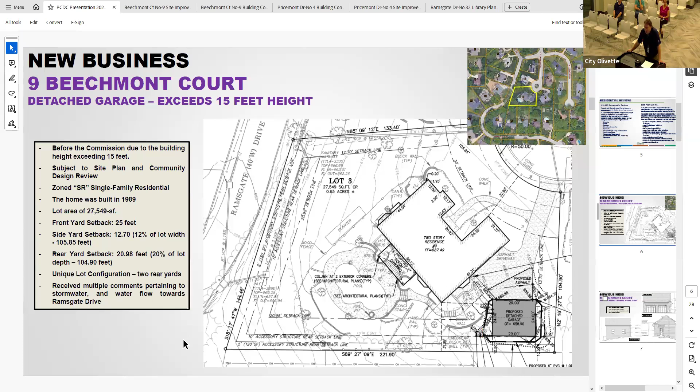We have also received multiple comments pertaining to stormwater and water flow towards the Ramsgate Drive area. So you will hear from multiple people tonight about that, as well as we have some more information later on in the presentation.

Also before you, within the attachments, you have your staff report, the petition application, the site plan, the building construction plans, as well as one email that we received from one of the neighbors.

So in front of you right now are the elevations for 9 Beechmont, which is the detached garage. You can see that the height exceeds that 15 feet, and it is about 21.4 feet on the front elevation, measured from the front side, the face closest to the street.

This can no longer be approved administratively through us, so that's why it's before the commission. It's subject to that site plan and community design review.

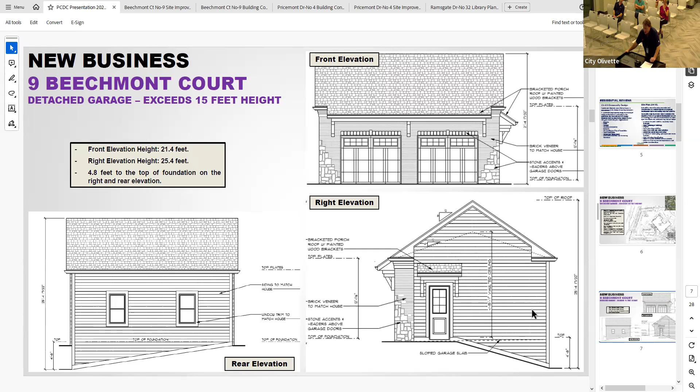They also sent in BMP information, and they're proposing to implement an NDS Flo-Well, which is kind of hard to see, but you might be able to see it better on the dais. It's located directly to the left of that garage. The graphic there depicts the garage, which is going to be a 696 square foot garage.

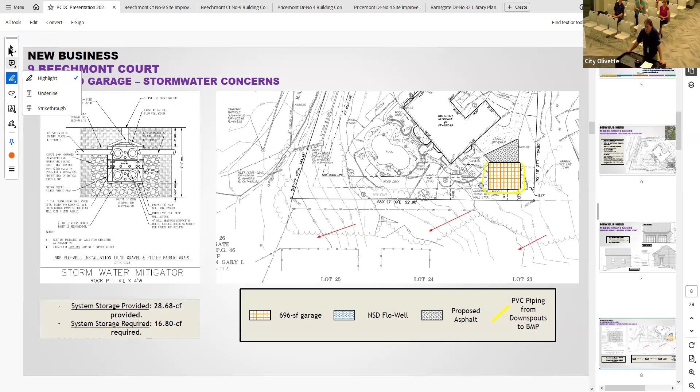This detached garage is due to the size of the lot. They're actually allowed up to 700 square feet for the accessory structure, so they're just a little, 4 square feet below would be too much.

They're also proposing adding some more asphalt to connect the driveway to the garage, and everything in yellow are the locations of the PVC piping that connect from the downspouts into that Flo-Well. Those red arrows depict the grade, how it will slope more east to west where the water is flowing.

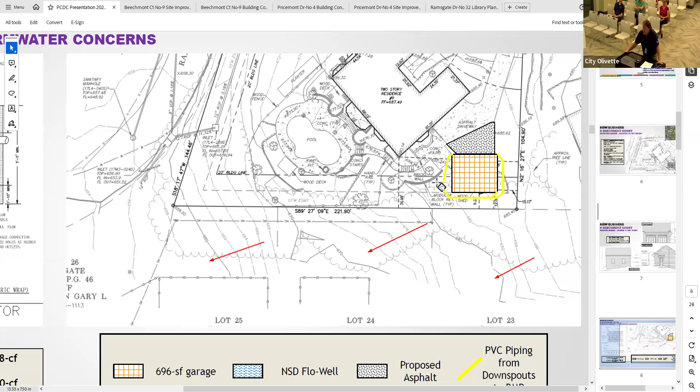Also, the storage system that was provided holds about 28.68 cubic feet, and through the calculations that we received, it stated that they were only required 16.8 cubic feet. So they have some more room for additional stormwater.

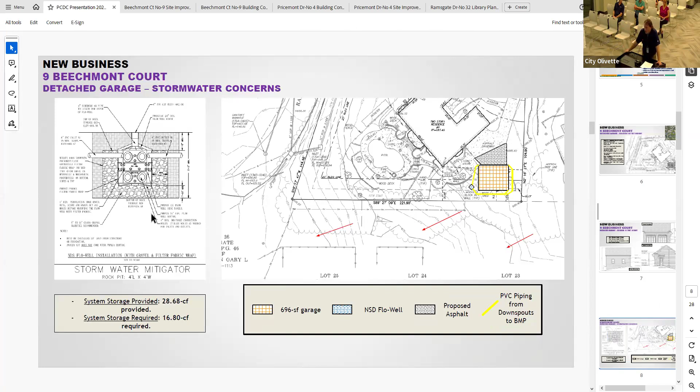In front of you is also something pertaining to the driveway and stormwater concerns. You can see that everything in gray is what was actually existing for the existing driveway. The portion in red is the part of the existing driveway that will be removed due to the garage. The portion in blue is the proposed 43 square foot driveway addition, so they're only adding 43 square feet from what was existing to the proposed driveway.

And then you can see that there was an existing shed in the location of where that garage is, and with the proposed garage, that shed will no longer be there. Just going to check through here real quick. I think we did receive those stormwater comments.

We received comments pertaining to different properties located south of the lot, downhill from 9 Beechmont. Of course, with it being subject to site plan review, everyone was notified with mailings within a 300-foot radius of the property, as well as we met with neighbors yesterday to discuss the stormwater concerns, and they are present here tonight to address those public comments as well.

How'd that meeting go? I think it went well. We addressed the questions, and then they're here before, going to step before the commission to state their comments and concerns pertaining to the petition.

So I saw the emails and they question a lot about the previous engineering study, things like that. So what was the conclusions? I had not been in contact with the person who sent this email. From what I understand, the petitioner is here tonight, as well as a representative for the engineering portion of the stormwater as well.

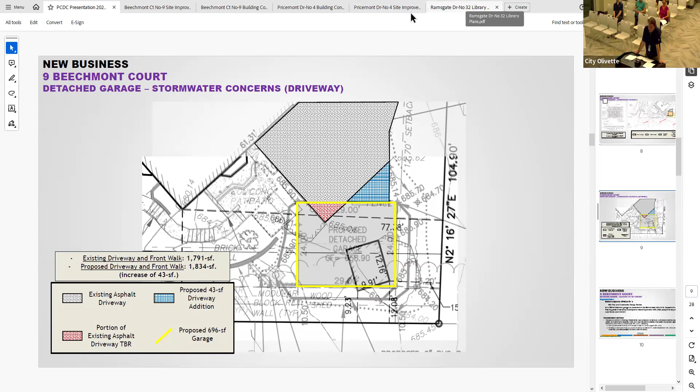Carlos, can you pull up a street view? Bear with me one second because I need to change the screen views.

And I would ask one of the petitioner representatives if this is the correct house. I believe it is, yes. And unfortunately, Ms. Powell, this is the next view on the streetscape, and then it gets cluttered, so that's as close as we get to that house. So I think going forward, you're going to hear me probably asking for an actual photograph rather than just street view, so that we can actually see what's going on in this circumstance.

So it looks like there is an existing garage on the left side of the structure, and I'm just curious as to what's happening with those doors, if anything. Are we going to a 4-car garage, equivalent of a 4-car garage? I think that's probably best answered by the petitioner. And what we could do is, if we don't have any more questions for Jack or Carlos, we could go ahead and bring the petitioner up.

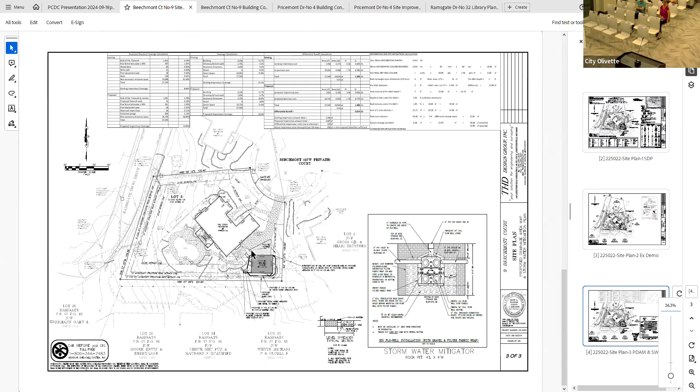Let's see if we could bring up page 3 of 3, please. Great, here we are. So if we could look and zoom in at these calculations up here, starting with the ones on the upper left.

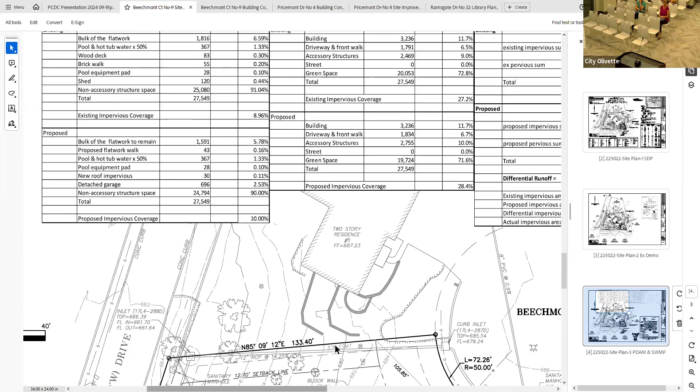These are required calculations for any plan that goes before Olivette. Olivette has an accessory structure coverage calculation maximum requirement of 10% of the lot area. The existing calculation of the accessory structure coverage percentage is 8.96%, and in the proposed, it's 10%. So there wasn't much room to increase that to begin with.

And then here are the coverage calculations. The existing imperviousness of the lot is 27.2%. We're proposing to take it to 28.4%.

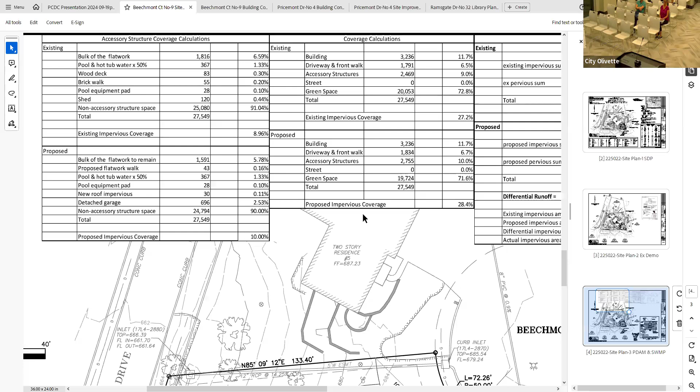If we could just pan on over here, we're done with those two sets of calculations. We've got two more to look at. If we could get this brought to about the edge of the screen, a little bit more.

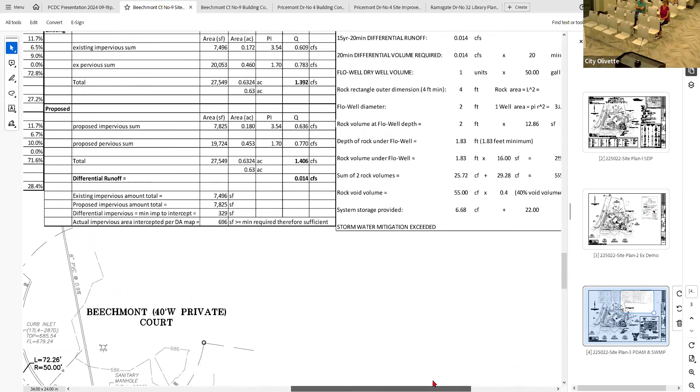Okay, that's great. So the third set of calculations is differential runoff. That shows that with the existing impervious area, times the MSD PI runoff factor, we get the individual CFS portions for the impervious part and pervious part of the lot. Those are added together, so in the existing conditions, we have 1.392 CFS calculated.

For the proposed condition, it sums up to 1.406 CFS. That's a differential of only 0.014 CFS. Just to put that in perspective, the typical MSD detention rule is they don't require detention until that differential reaches 2.0 CFS. So we're less than 1% of that amount.

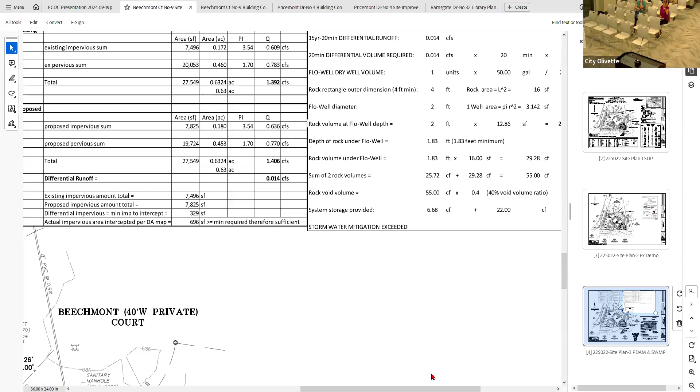This is really almost nothing, but it's not like we're not doing anything about it, because we are mitigating in the Flo-Well system. So we've got our differential runoff, 0.014 CFS, times the MSD 20-minute storm - 20 minutes times 60 seconds - gets 16.8 cubic feet. That's what's required. We're providing almost twice that much.

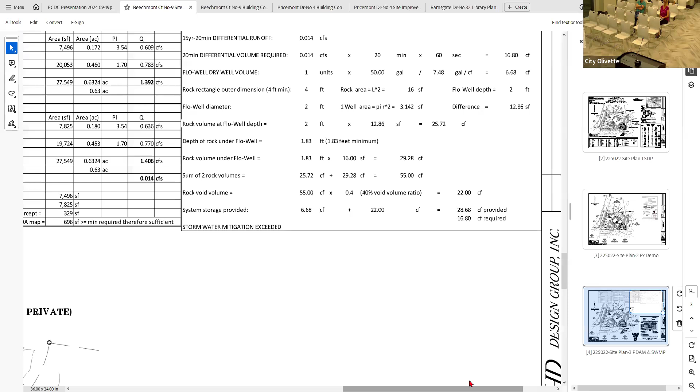If we could, I think on this sheet, maybe on the left side, there's a diagram - right here it is, I'm sorry. This is our stormwater mitigator.

In this, the flow is going to get captured from the roof drains on the proposed detached garage. It's going to get routed from all four corners, brought in on two sides, just like the picture shows. So water's going to go there. Here's the dimensions of it.

It's just from the surface of the ground, a little under 5.5 feet deep. Water's going to come in here, be dropped into this plastic chamber, this Flo-Well chamber, and water will be able to come out and sit here in the rocks. It will get a chance to percolate into the ground over time.

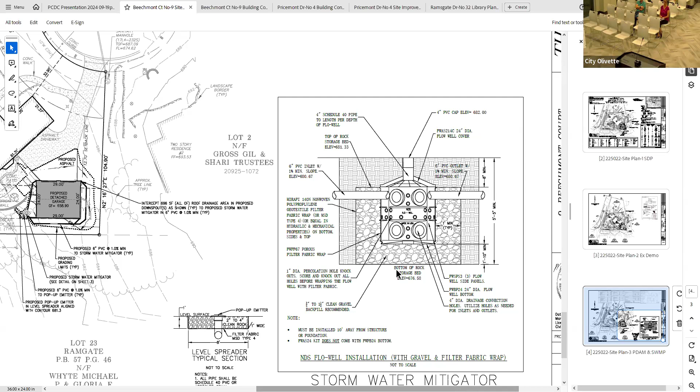If by chance during very intense storms this would all fill up and the infiltration ability of the ground would be exceeded, the stormwater would slowly rise up to here. Then, with this as an intake pipe and this as an outlet pipe at the same elevation, it would discharge right here in this very short pipe to this level spreader, which there's a diagram of right here.

It's 8 feet wide, and it comes up in this pop-up emitter, and then from the pop-up emitter, it will run into the gravel, which is 1 foot deep, 8 feet wide, 1 foot in depth also. That allows water to have a secondary chance to percolate into the ground. And then as that would fill up and start to leave, it would be in a similar or better condition than the existing.

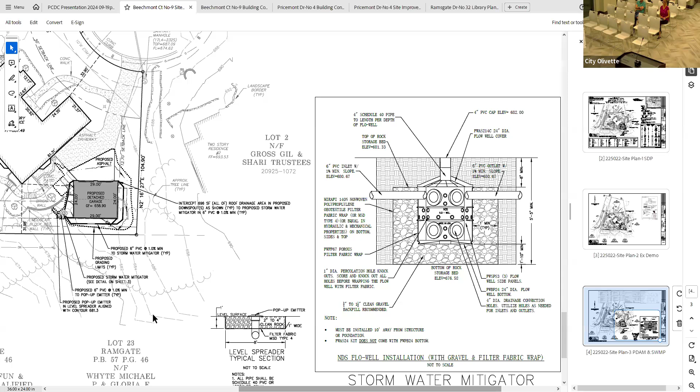These stormwater mitigation systems have been in existence for about 10 years. Almost all the municipalities have adopted them as a way to allow reasonable, small additions to a house, such as in this case, where the owner wants to add a detached garage.

I appreciate it, good job going through that. The question I had was about the slope of the driveway — is there any way to get the discharge to follow the driveway to the street? I was looking at the contours and honestly couldn't tell. Carlos, could you pull up the street view?

I think that's probably not going to tell us much, but we can look. I can see a contour right here at 686, and a break right at the setback line. It looks to me like this water is going this way. I don't know if any of it's getting to the street — I'd doubt it. I'd say it's probably just running over here.

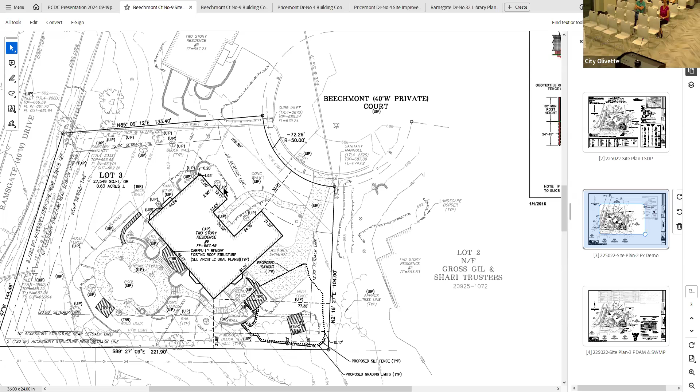It's very informative. Does anybody on the commission have any questions for the engineer or the petitioner? If not, is there anybody in the audience with a public comment? Go ahead sir, remember to state your name and address for the record.

I'm Michael Whyte, I live at 23 Ramsgate Drive. That's my wife Gloria, and our neighbor at 24 Ramsgate Drive, Dr. Shu Chuck. Thank you for allowing us to meet with you. We had the pleasure of talking to Mr. Trejo yesterday and his associate about the plans, and we looked carefully at what you showed here and wish the project the very best. But we're worried about the water issue.

It was described a few minutes ago as heading southwest. That's probably what would happen with substantial rainfall in the future if that garage is built without adequate drainage. Currently in our backyard at 23 Ramsgate, partly behind number 9 and the other house, there's a slope, but if it rains an inch or two it comes down uniformly and doesn't threaten the house — no problem. But three years ago I went emeritus at Washington University School of Medicine and I remain active doing research. So I spent $120,000 to build a library in my backyard, which will be directly behind that garage. We have pictures of it.

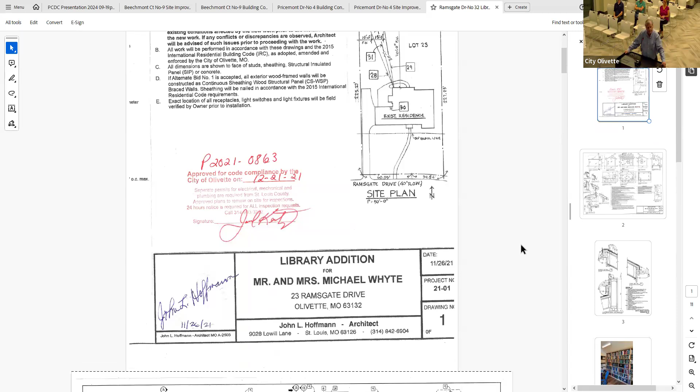It fit on the footprint quite nicely, but it's not a shed for tools. I moved 130 books into the library. You'll see it in a second. There's research journals, and I have my Washington University computer in there, printer, and that's where I write

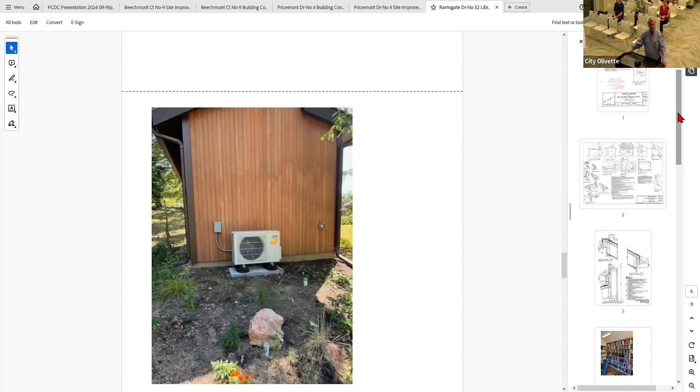research papers, edit books, review submitted papers. This is directly behind the proposed garage, where currently, without the garage there, the drainage is sort of due south. If that's there, it's going to head southwest. And on the west end of this library is that mini split, which is just above the ground, and that's what's cooling and heating and supplying electricity, well, heating and cooling to the library.

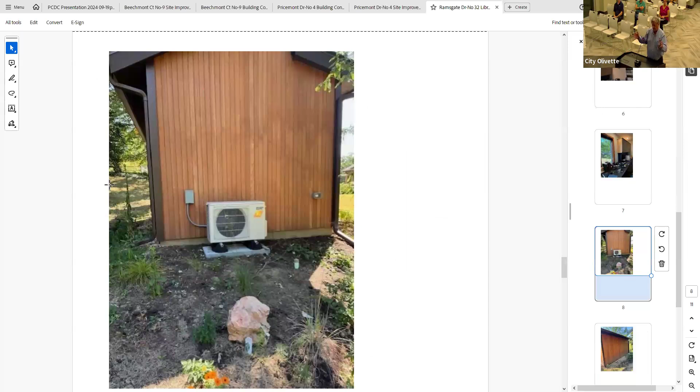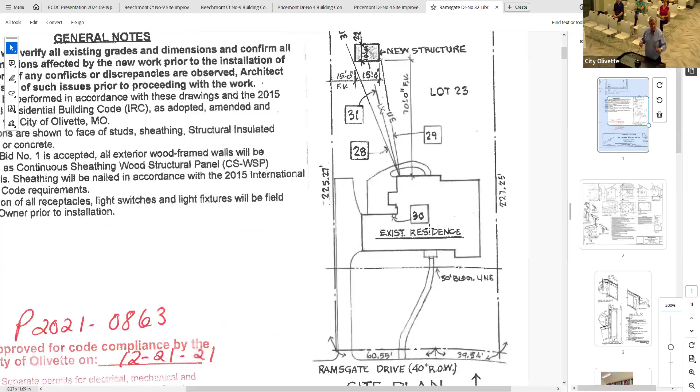And I'm worried that that might be jeopardized if there's a 1 or 2 inch rainfall. We heard about the cisterns that are planned, west side, and maybe the east side of this proposed garage. But we have to understand the capacity, cubic feet. If there's a 1 inch rainfall with that sort of area on top of the garage and it's heading into a cistern on the west and it exceeds it, what happens with that water? Is it going to come into my library? That's the question. That's our worry.

Understood. Do you currently have any issues right now with that house under the existing conditions? Oh, no. In terms of water to our house with the way the house is currently, I don't think so, have we? If we had the 8-inch rain, water.

No, but that's because of gutter clogs around the house. I don't think that slope has ever jeopardized the house, being far away and that sort of area able to accommodate even a substantial rainfall. But this, with it coming into cisterns on the west side, will probably head right back to our library.

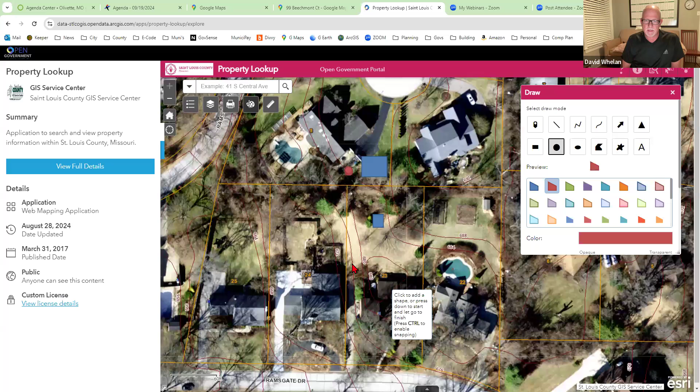Okay, can you hear me? Yes, sir. Thanks, David. I just want to take this opportunity to voice my concerns about the existing problems with the storm sewers on Ramsgate, the lower part of Ramsgate. Especially since the city has been advised that there's a storm sewer that's been deemed undersized for the area. I don't necessarily, I think what they're probably building is going to be wonderful, but I just want to take this opportunity since we have so much water in the area

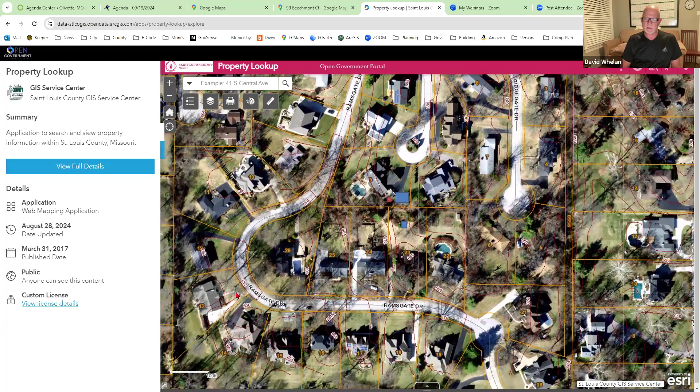that we address the big concerns around the curve there at Ramsgate. Has there, I know this is not the meeting for that, but has there been any more talk about resolving our undersized sewers? Carlos, can you answer that? Yes, and what Mr. Whelan's referring to is when we had a new home built on Stony Side, we set aside some funds or got some funds from the council to do an analysis of some of the concerns that were expressed in Ramsgate.

In a bigger view here, the area probably should be or isn't part of a floodplain, but the floodplain analysis never extended further north. So these properties along here and in the backside of Heatherwood get inundated with rainfall that comes as far north as Old Bonhomme.

To exacerbate that, the MSD or stormwater infrastructure, not sure if it was MSD that initially put it in place, is now undersized. So even based on the existing houses, when the area is calculated and put towards one of these rain events with the new standards that we have, the pipes are smaller.

Mr. Whelan has experience in his home. He's got an inlet along his driveway where it'll become like a geyser because of the pipes being undersized, and there's so much pressure in those pipes it'll pop up the inlet, and some of the neighbors further down too. And then the street itself, whether it's at the time of design or after multiple pavings, the curb system is very shallow.

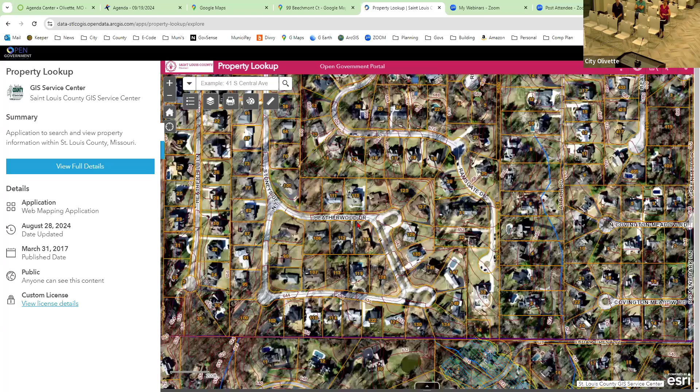This is like death by a thousand paper cuts. We only see individual projects, and we're not very good, not Olivette or any city in particular, at looking at the cumulative effects of these projects. So here we have another garage that's going to increase the amount of impervious surface. That water has to go somewhere. It will go somewhere. If the detention works, great, but if we just keep allowing bigger driveways, bigger houses, that is less space for water to go into the ground.

So it's a dilemma, in my view, when we're looking at individual projects, because the calculations show there's just not that much difference between what's there now and what will be there. So the question is much higher level than that: are we going to allow this? I'm torn between allowing this, knowing it's not going to really make that much difference, but in the scheme of things, it's all these little things that add up significantly.

But just as a point of information, it's actually making things a little bit better, with the system in place. Unless it's full, then it's useless. Unless the system's full, it's not useful. I appreciate your point, Don. If it was full, you'd have other problems too—it'd still be running off. So that argument isn't quite correct. You've gotten a big gain by having it go into the system and getting that retention, as well as flow into the soil. You're getting a positive result here, not a negative result overall.

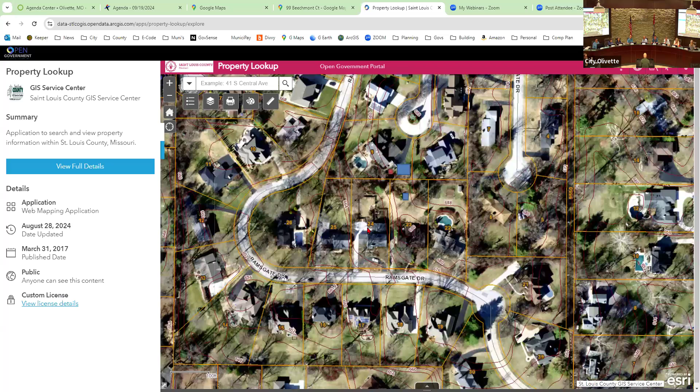Hi, my name is Shu Chuck. I live at 24 Ramsgate Drive, and I've been living there since 1979. When there was heavy rain, the rain from my backyard is right opposite to number 9 Beechmont. When it rains heavy, the water runs down from back there and goes to the north, to the east part of my house. I have 2 window wells in there, and the water usually seeps in, and my basement on that part is always wet if it rains hard.

So I don't think that the water runoff from the new construction up at number 9 Beechmont - I think it'll make it worse.

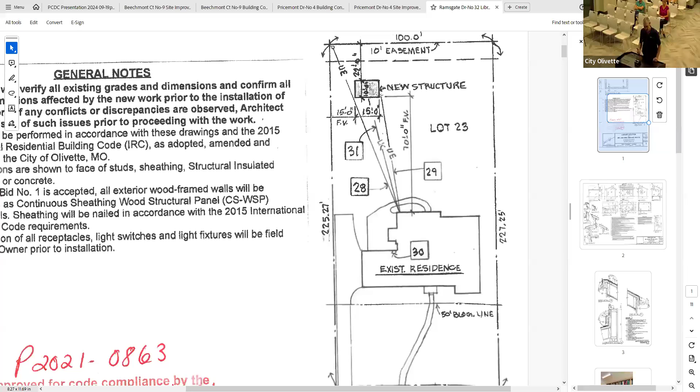The question is, what is a significant amount of sediment? So we looked at the diagram before, and from the cap that will be on top, which is not an inlet, but just a cap, like on any typical sanitary sewer clean out, although this is a stormwater system, the flow well system is a little bit more than 2 feet deep, maybe 3 feet deep. So I would say if you're looking at something that's 3 feet deep, and you have maybe 1 foot of sediment in there, I would consider that significant. Certainly when it gets to be half full, then it might be time to get it cleaned out.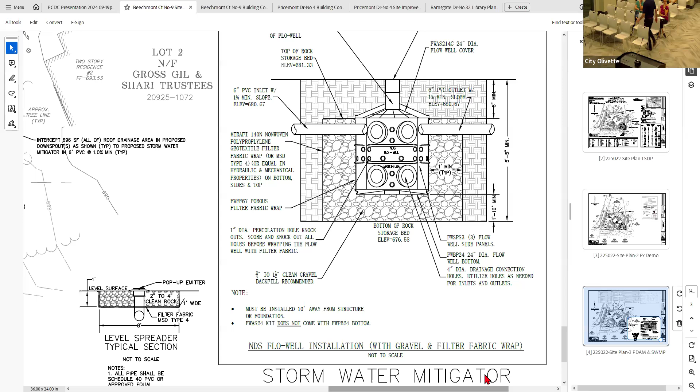Okay, thanks for everybody's comments. I appreciate the time and stuff. So, Chairman, if you don't mind, I can also...

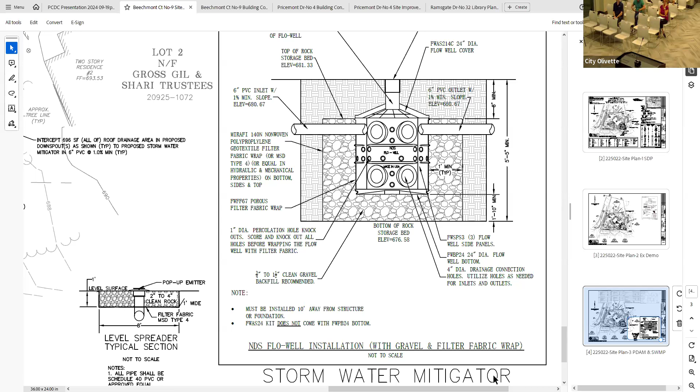And this is more for the engineer only, because it's reflective of one of the email comments we received in the design. It was specifically about referencing soils in there and being very clayish. When the system is designed, how much depth is in there? And is there anything done special if it's noticed that the lower soils just aren't as absorbent?

No, there's not any infiltration test required. In municipalities such as Kirkwood that encourage infiltration tests... sorry, so the question again was, regarding soils infiltration, if the soil's different, is there any consideration to that, like the imperviousness or whatever of the soil?

So there's no infiltration test required in the city of Olivette. In some of the more stringent municipalities such as Kirkwood, they would like to see an infiltration test, but typically it's not done. Their penalty for it is they just require you to put 10% more volume in the stormwater mitigation system, which we've already got way more than 10% volume. So we're fine for any kind of conditioned soil.

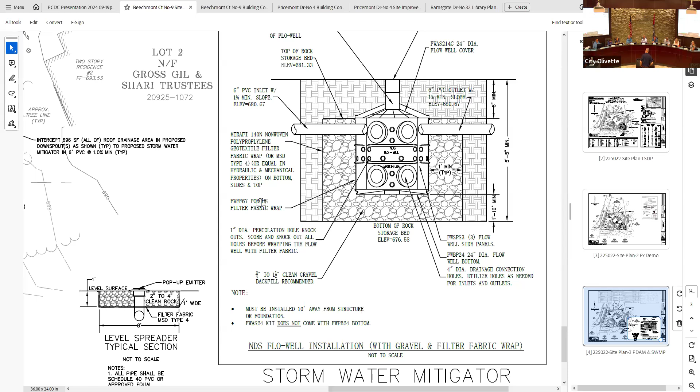Thank you, everybody. Appreciate it. Feel like I learn something new every day.

So now let's have some discussion. Tim, you were talking. So I basically said it. I think that there's obviously a major problem here, and we've known about this problem. We've talked about it many times on this board, and this is not the structure that's going to change that, or change it negatively, in my opinion. I think that they're doing mitigation. It's making it better. It's a small structure, small, more impervious surfaces. I'm not sure if that's a problem on this lot. I mean, we're not going to solve this problem. I think we're making it better, though. I don't think this is a negative, is what I'm getting at. It may not be much of a positive, but it's definitely not negative to the part of it.

I agree with Tim, if we accept the calculations as correct, which I have no reason not to, it seems like it's actually an improvement. As to the issue about death by 1,000 cuts, all we can do is try to mitigate every single cut so that in total it's actually less, because my concern is that every time we approve one of these, it makes the problem incrementally worse. The one concern that got my attention was the possibility of increasing the pitch of the property if dirt is not properly disposed of or mitigated in some way. So I'm wondering if there's something we can do to ensure that at the end of the day, this actually isn't raising in elevation, because that's not captured by this plan.

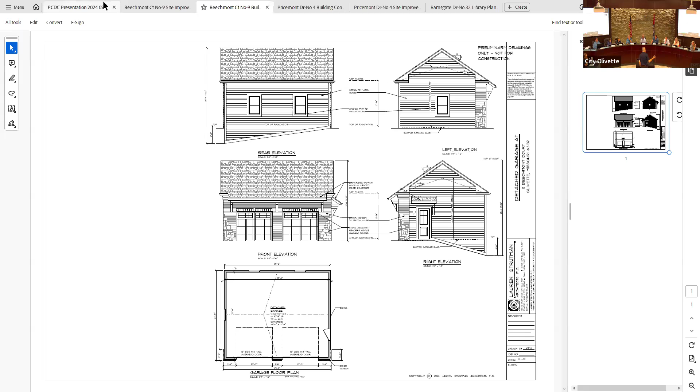We also want to say that, as shown on sheet number 2, there's a silt fence going to be placed downstream of any area that's graded. That's the traditional measure for that, and this project is about as minimal site disturbance as there is going to be. In addition, the stormwater mitigation chamber is going to function during construction the same way - the water is going to go into that, be captured, and treated by it.

Any other further discussion? I did have one question I wanted to address earlier about the gentleman's library. Could we bring up, I saw one of the slides and I think the library was represented by a blue square or rectangle?

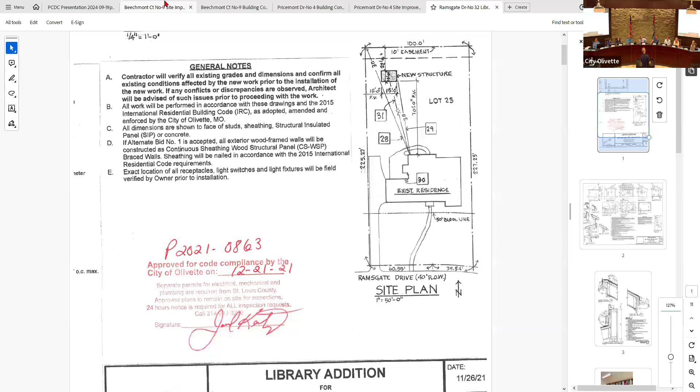Okay, there we go. If I could just kind of point out with my hand over here, please. So this is helpful because it shows the existing contours, the topography of the land, and this being the proposed detached garage addition, and this being the existing library, correct?

Okay, and fortunately in this case we can see from the contours that stormwater will flow perpendicular to the contours, and this flow is headed this way already, and our flow is headed over here, so it's not even going to touch that. Our water is all going to be discharged over here, so it does not really have a chance to get to the library.

So that water that you pointed out being discharged can't go south - it's headed east, southwest, then it's going to turn and head west into the street there on Ramsgate.

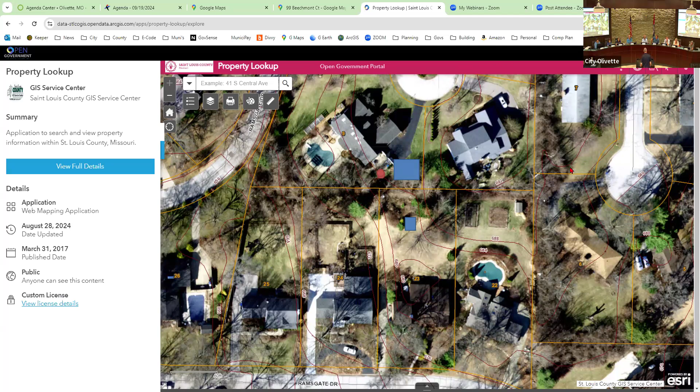The only thing I was wondering is if there's any way to spread out the discharge, so it's not coming out at a single point but spreads out a little bit more. That's the idea behind the level spreader, to not discharge it at a single point but to spread it out over 8 feet. Looking at it as it will be on the ground, it will be 8 feet by 1 foot there of gravel. Right, thank you.

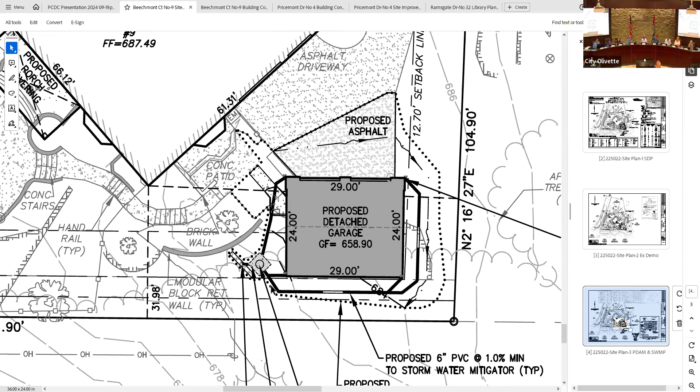So is there any other discussion? I also want to add that the level spreader is oriented with the contours, so it's going to encourage a sheet flow, not a point flow. Thank you. Any other further discussion?

No? Okay, do I hear a motion? I'd like to make a motion. Go ahead, Sam. Motion to approve the petition for site plan and community design review for a 696 square foot detached garage as presented in the memorandum from the Department of Planning and Community Development dated September 19th, 2024, subject to any staff conditions noted therein.

Motion's been made by Sam Wallach. Do I hear a second? Second, and seconded by Tim Spiegelglass. Carlos, please call the vote. Commissioner Spiegelglass, approve. Commissioner Ragsdale, approve. Commissioner Powell, approve. Commissioner Wallach, approved. Commissioner Lewis is abstaining, and Commissioner Drill, approved. The motion passes 5-0.

Thanks, everybody, for going through this. I think everything was presented very well, and we did hear some more of your concerns related to this. So thank you very much to everybody that made comments, hopefully we can work together and see if we can do something. Thank you. Very impressive.

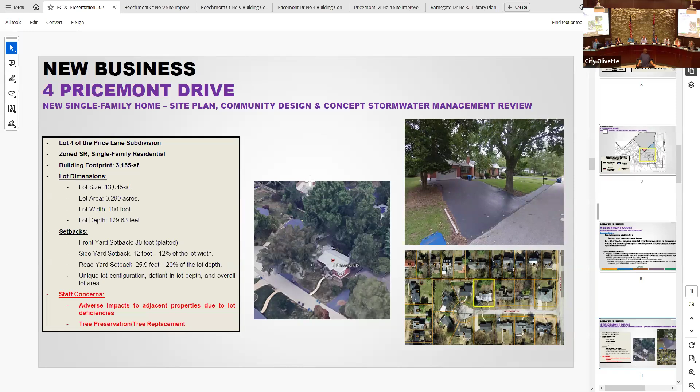The concerns that came up for this property were just the adverse effects on adjacent properties due to the lot deficiencies, as well as tree preservation and tree replacement. We did get an arborist report, but it's just how we would address the commission and how we would implement those replacement aspects of it.

In terms of community design review, the only things that stood out to us were concerns with tree preservation. We have the arborist report and wanted to speak on that, as that was mainly the only thing here.

There is a grade drop, about 4 feet from where the front of the house is down to the street. They propose a backyard PVC piping with catch basins, I think just to accommodate for any excess water that would be ending up in the backyard.

From the site plan and stormwater information that we received, the calculations depict everything from the house as well as that covered porch that is to the north of that site plan.

We got information pertaining to the adjacent homes as well. 3 Pricemont, located to the east, was built in 1940, and that home underwent construction for a kitchen renovation in 2001. 5 Pricemont, located to the west, was built in 1950. So these are some older homes, but in 2005 they had a retaining wall installed, and the home also had additions constructed. So there haven't been any new homes, but they have done some work prior to this item.

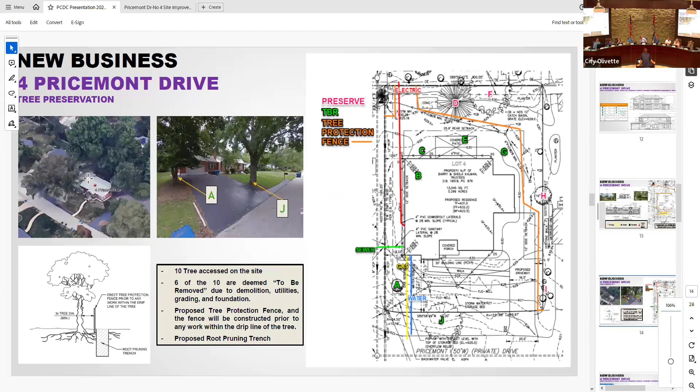As of right now, from staff's point, we've compiled all of the information from neighboring municipalities. So we've taken information from Clayton, Webster, Ladue, kind of seeing what all that they've been doing. And then I think our goal is to send that information out and provide that information to you guys so that then we can all work together on finding the best way of addressing those concerns and how we would replace those. I think Carlos and I were talking about the canopy coverage, but we've noticed that a lot of places, different municipalities, do it based off of canopy coverage as well as the caliper of the tree.

The caliper really depends on, I think the caliper more focuses on what will be replaced. So if you take a tree out of a certain size, then you have to replace it with 2 trees, or some sort of policy in that way.

So I have that information of all of the municipalities, and we have a table of all of them kind of in a short little answer that you can just reference quickly, and we can send that out to the PCDC committee so that you guys can have all that information. Because we definitely need to get on that. Yes, sir. Yeah, I can send it out tomorrow. Okay, good. Appreciate it. Thanks.

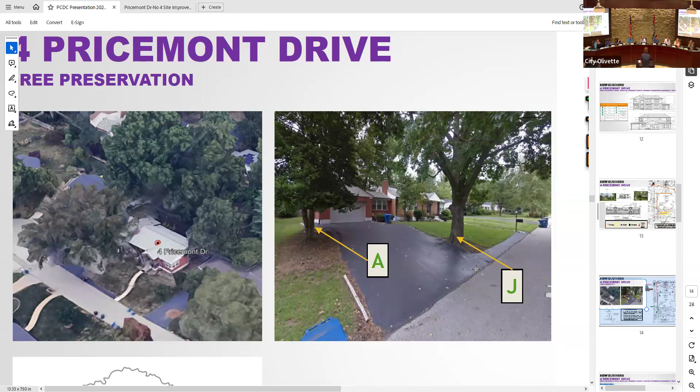Go ahead, Tim. Is there anything else on that street that's been developed on the whole street? I know you said about the right or the left, but is there any other houses? Yeah, number 1 has been.

Can you pull that up, Carlos? Yes, doing so right now. The gentleman behind me also said, I think he said 1 and 2.

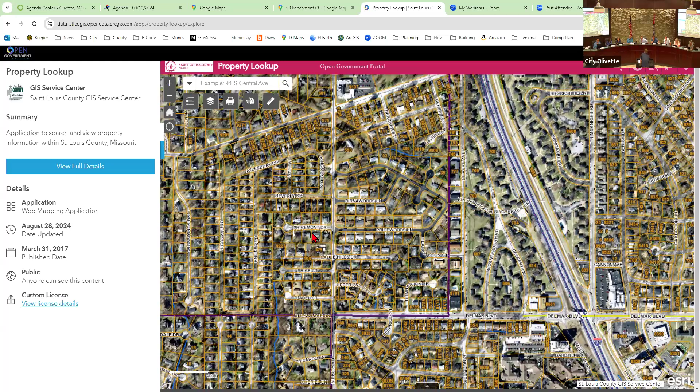We also addressed, staff sent out a review to the developer and the petitioner talking about just different things that we caught, and you have that review email also within your packet that just kind of looks at different aspects, but all of those concerns that we had were addressed back with the revised plan set that they submitted that's in front of you currently.

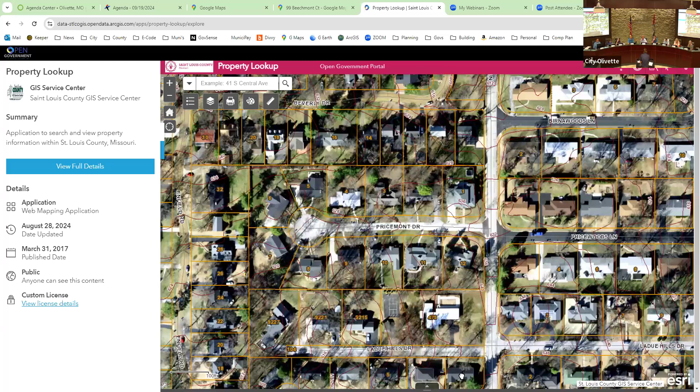And is this a 2-story? Not 2-story. The entrance, is that a 2-story height entrance? Am I looking at that right? I would believe so. Wasn't that something that was one of the things that were highlighted on our guidelines to avoid? Am I dreaming that?

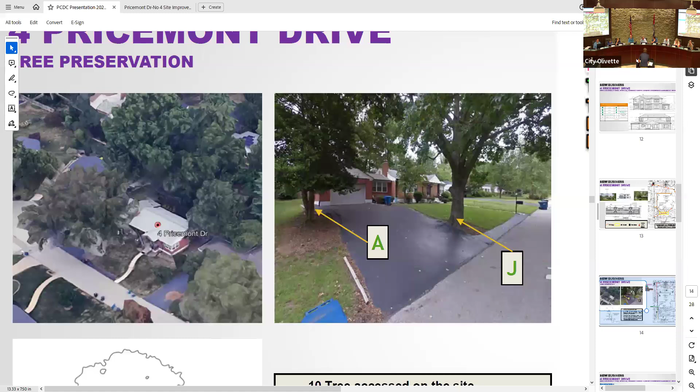Not that I've seen. Okay, unless... no, it's, never mind. That jumped out to me. It did? Yeah, the 2-story entrance.

There's been concerns in the past expressed by the commission on how they were designed. This one's a little bit different, but there has been some others in which we had a former member who was adamant about how high it was, and it was more of an arched aspect of it. This is a little bit more subtle, but it has been brought up in the past. Okay, that's why I just wasn't sure if that was part of our guidelines or not.

Staff is also just seeking clarification that on the site plan, for the stormwater, you can see that the orange PVC piping is only going around 3 sides of the home. For clarification, everything within the calculations is being captured, and they do show downspouts on the elevations, the building construction plans. So staff is just asking, this is not the right printed staff report, but that they verify the downspout locations prior to submission, that they have those indicated on the plans, and that we are seeking verification that those would be connected to that PVC pipe system that's already in play or that was proposed.

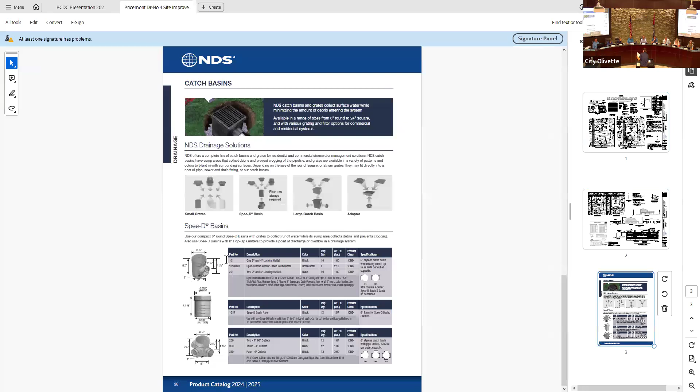For the garage, where's the gutter? That's the downspout for the garage, I think. On the west elevation of the building construction plans, you can see that they have a downspout running, I don't, I can...

Yeah, and they're running those, but those were just not depicted within the site plan that we got. So we caught that, and then we were just saying that as a condition that they need to verify that.

Chairman, I'll note what the surveyor is indicating here is that the entire roof area is going to the storage. So even though there are those elevational changes here and here, they didn't show the gutters going in there, but the calculation is set that all that has to go into the detention pit. Okay, so it'll be verified.

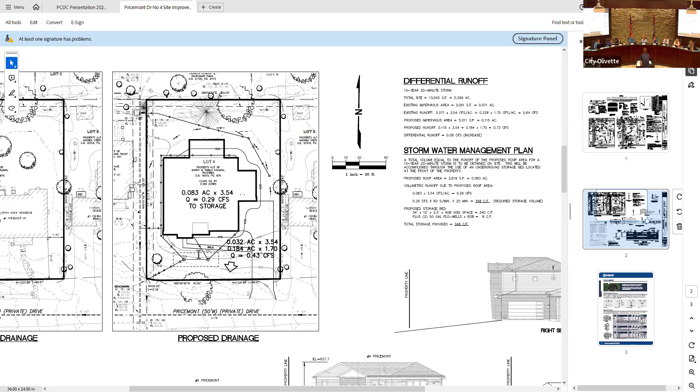Go ahead, couple of points. First, do you know the condition of the existing house? I think it's vacant right now. In terms of what do you mean by condition? Is it habitable? I would assume yeah.

Like currently, do people live there? I know that no. Or is it habitable, not whether somebody's actually living there? It's not in any violation. Yeah, it's not in any violation.

Okay, so this goes back to comments I made last time, which is here we have a street and neighborhood where there are only two McMansions on the block, but all the other houses around there are single story ranch style houses. And now we're going to take out another one to put in this. I'm concerned that we're just going to keep doing this without having a plan, so to speak.

But putting that aside, if that house is in good condition—because I actually looked at the house that is number two on that block before it was torn down, and it was bad, really bad—so I am curious about the condition, but I do have concerns about how we can say this massing is appropriate, given that the rest of the block, everything but two houses, are all story ranch houses. That's the first point.

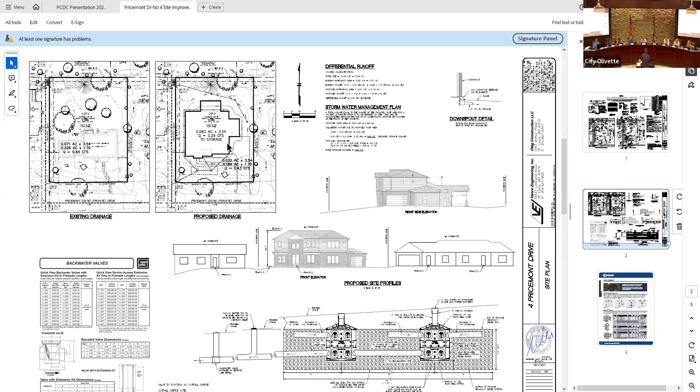Well, they've indicated on their arborist report that it's going to be in the way of the demolition of the house as well as utilities. Okay, well, how—you can get a report saying how big, sometimes, but just relax, let's kind of go through this, okay? I mean, sometimes the tree canopy itself isn't shown exactly as it is on the drawing.

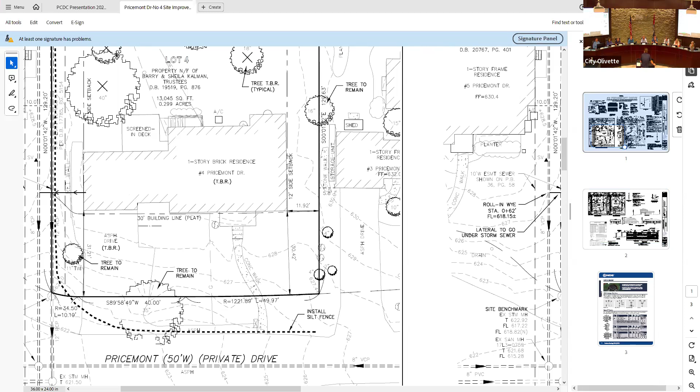It will be dead before they're done with construction, because of all the roots and you're disturbing it. I mean, this thing's been in place for 50 years, hasn't been disturbed. All of a sudden you're going to take a tractor and go right next to it and rip down everything it's put down. It's heavy, and you're going to hit it and do stuff. Whether we tell them to actually take out that tree or say leave it, it's going to come down eventually.

I built my house, you can look at my house. I have a circular driveway on my house. I kept a tree just like this because I wanted it so bad. Guess what? Two years later, I was bringing it down. It would have been much better to bring it down before. I would have designed my house differently if I wasn't waiting for that tree to come down. Really?

I don't think anybody here wants to tear down trees, at least on this commission. But we do need to hear what the impacts are for this type of work, and the impact to the existing lot and size. As much as I would love to potentially save this tree, we don't own it.

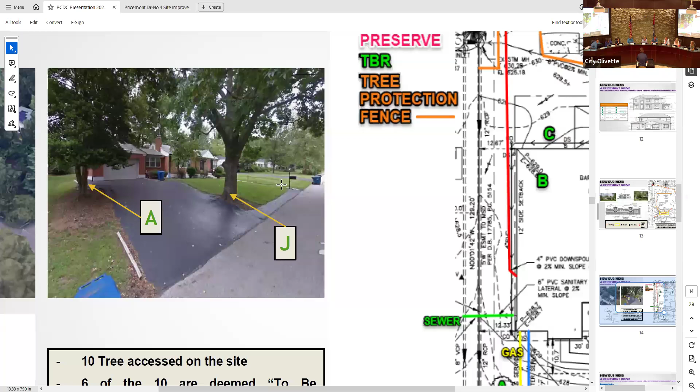If there are no other questions right now amongst the commission members with staff, then I think we should bring the petitioner up.

Yeah, you guys want to come up? Remember to state your name and address for the record, and turn on the microphone please. Thank you, my name is Pavel Ivanchuk. I'm an architect, I live at 101 South Brent in Oakland. I'm ready to answer any questions.

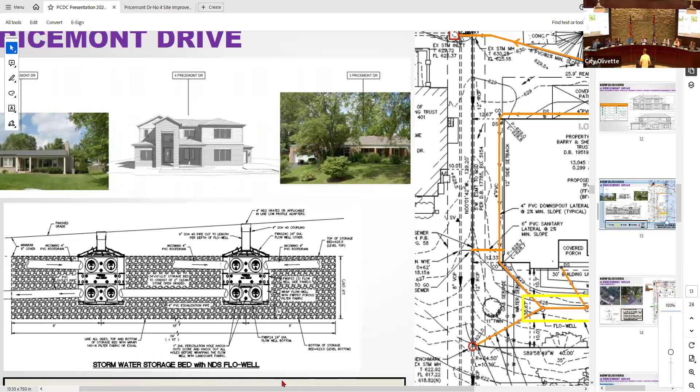I think there's some concerns regarding massing. So if you could go through that, that'd be great. Could I ask you to speak up? Typically we try to just have sloped roofs on the sides, not have any gables facing to kind of soften the edges of the second floor. It's a device I've been using routinely in this area to bring down the mass, while keeping the constraints of the program requirements from the developer and working within those parameters.

I think the ceiling heights are fairly standard - they're 9 foot and 9 foot, so it's not an exorbitantly tall building. He does like double height entrances, so that's one of his requirements. We do consider maybe putting an arch instead of a rectangular opening, so that's something we probably will do.

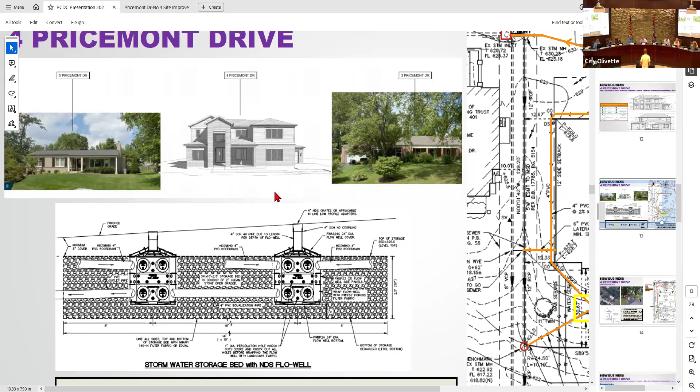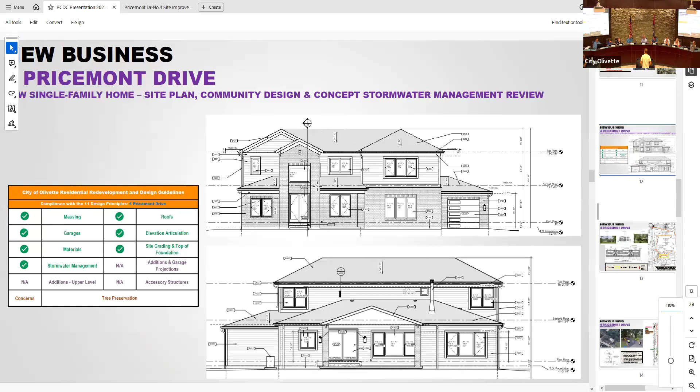Sometimes I've seen where you have the lower level wider, so that way the roof steps down a bit more. I'm not sure - I see that on the garage side, but I don't see it necessarily anywhere over here. It's not that I want the house to get bigger either, but is there anything that could be done? I think the study in the front on the left is stepping down the front, so maybe that elevation is a bit deceptive from a perspective, with the front roof there.

If anybody else shares any concerns or wants to direct - I'm not an architect, I'm an engineer, so.

Chairman, I'll note some of these things because again, we get direction from the commission as we work with the developer's team and designer on this, and what we look for based on the context of the guidelines and what we hear from the commission is the incorporation of the horizontal elements. This is not a prairie house, but it's pretty close to incorporating the horizontalness there.

The other thing is the breaking up of the roof mass here to mimic that one-story house that was once there. And again, this is fluff words, but that's part of the design concept. These are the lowest roof pitches that we get. Most of the time, and you saw it in this garage a while ago, that was 8 to 10, 12. These are about 4-12s or something like that. Their whole intent is to look horizontal.

The pop out of the access garage, because it's another garage - I mean it is, but it breaks down and steps down with a neighbor on the east. And on the west, you see this one story pop out here, and then back in the back, you see this one story pop out here. But there is this 2-story mass, but they bring that gable down in there.

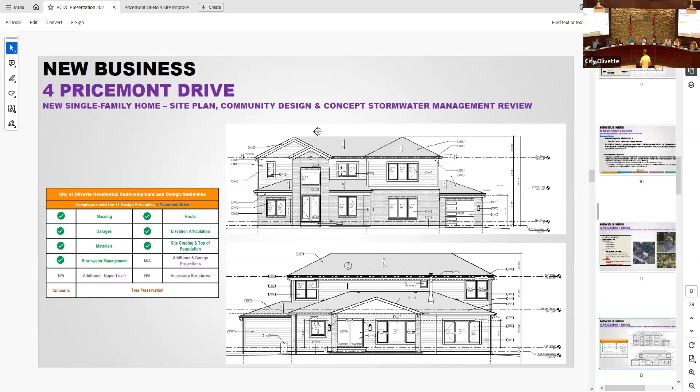And that's okay, there's nothing wrong with that. But then kind of make that exclamation point a little bit more subtle by adding some more horizontal elements into that process would probably help and alleviate some of the concerns, especially with the shade and shadowing that you see in that aspect. But I do think, when we go through these, and again these will change over time, and you guide us on how we look at these, that roof pitch, that step approach is to acknowledge that it's against an older home that doesn't have that same type of height.

The same elements are incorporated here, and they have gotten better. There are some examples in which the adjacent house did not take into any consideration what was next door, and you have roughly almost 4 levels of house: basement, the first floor, the second floor, and then the gabled roof right next to a neighbor.

I'm happy and confident this commission is going to get more into the details, and that's great, because I think it leads to better architecture. But I think those elements are in there.

I like the way he uses the materials, again, to spread the length of the house and the width. He's got the windows put together to spread the width of the voids along the house. The siding, running horizontal, again spreads the length of the house, which then as you spread the length, the height becomes less and less. It's like elasticity or so. But that's how, when we do our analysis, is what we're looking for.

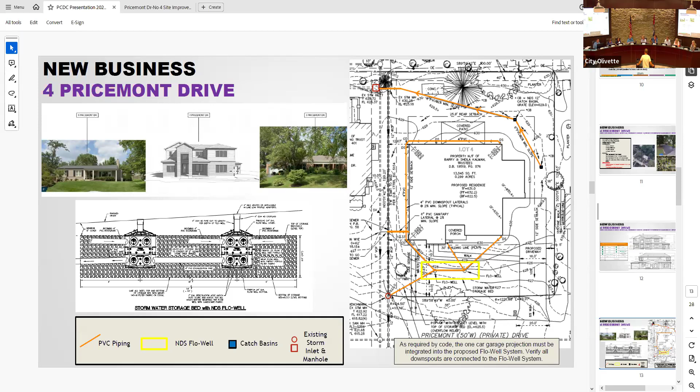So at this point, I think we want to wait until they come back and look at what they might do with that center part, or are you going to add something? What was the direction? Where are we going with this? It's up to the commission. If there is any... if they wanted, I mean, if we approved it, that means they can't change it to an arch, Carlos?

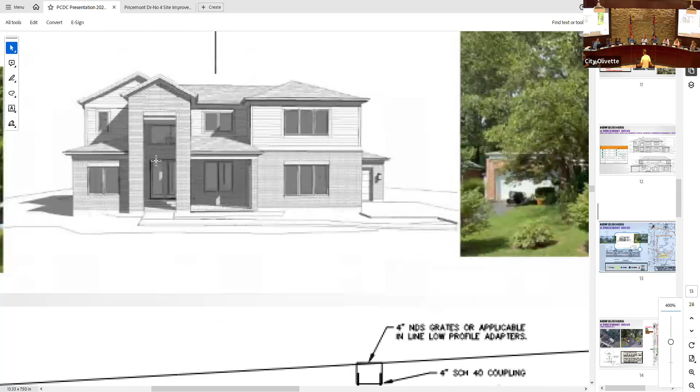No, you can do a couple of things. One is you can assign it to us to make a decision on the commission's behalf with some guidance. Or we can bring it back, but what they do to that elevation isn't going to substantially change them continuing into the next permitting site. And I apologize, I'm trying to pull up the plan set. That's kind of where I'd leave it.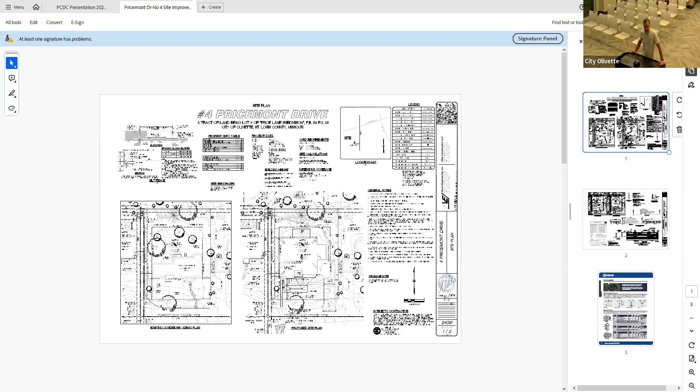Yes, I get it. Leave it to staff. I think the arch really came about as a reaction to some of the sentiment expressed about softening that, but I think a more rectangular shape is more appropriate for the context, more of a modern expression. So I agree, I think we're gonna keep it as is. Good point, good point.

Yeah, I would stay. All right, person's preference. Thank you.

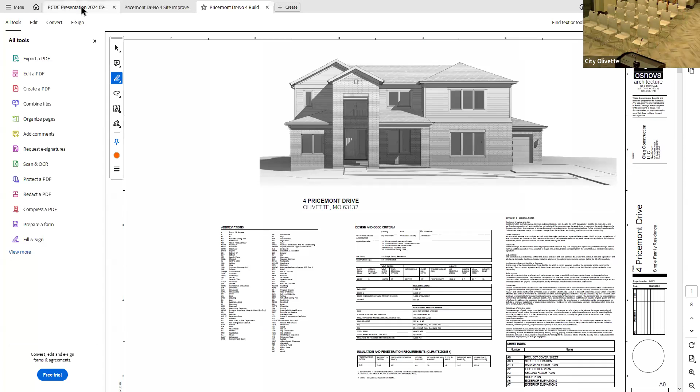All right, any further discussion? Any public comments? Seeing none in the audience. Carlos, is there anybody else online? I still have Mr. Whalen, I'm not sure if he would want to comment. David, if you want to speak, just show your hand regarding this item. Okay, seeing none.

One other thing, because it's not very clear yet, and maybe it would be part of the discussion, is on the trees in there, and to go over what Jack had talked about in terms of our recommendation, and how we look at this. And again, this is fluid, and it's going to evolve as we're tackling this. But we looked at it that B, C, E, and G were just poorly placed. I mean, it might have been great at that time, but they're in what the city's defined as the buildable area. We do believe there's an opportunity to preserve H, F, and D if they put the proper fencing, and we're adding that as one of the conditions.

They're not extremely significant trees, but D and F are pretty nice. The big ones, and the nice species, are right here, and that's unfortunate. And even if they could be, when you look at A, even C and G, if they can be preserved, you know, while we're trying to protect them, insurance is trying to get rid of them because they pose a risk being in that close proximity to the old house or the existing house. And those are decisions we're going to have to struggle through.

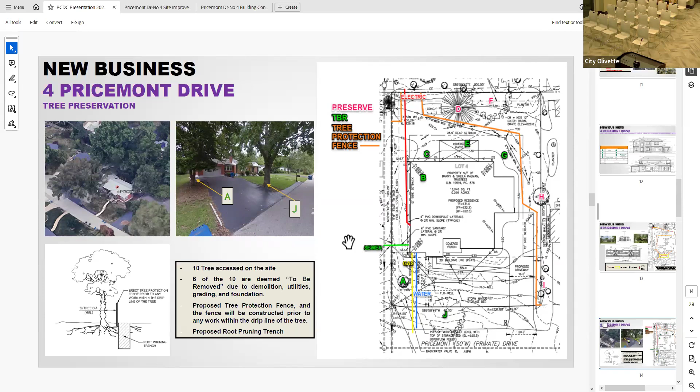Anybody else have any thoughts? Just have a general question - go ahead, Tim. Just so I would know, the tree protection fence, are they going to have that, and then also an orange fence that goes around the site on top of that? Is that what I'm looking at?

That would be the preference from our end, because it needs to be distinct. It needs to be clear that this fence represents a different demarcation than the construction fencing, and different than the siltation fencing. The other thing is, my staff are inspectors, they're building inspectors, whether they've got green thumbs or not, that wasn't what we hired them for. Having a distinct fencing that's color coded, a different type of material, just to make it explicitly clear what the intent and purpose is would be ideal.

Kind of like what was done at Stacy Park when they were renovating, they had two distinct types of fencing being done. I noticed that during that work at the park. So I'd like to make that part of our recommendation. That's already part of it - it's noted in the report. Yeah, I believe so.

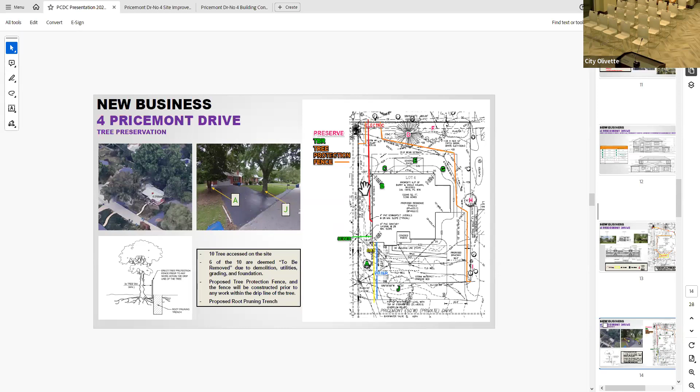Any other discussion? If not, do I hear a motion?

I'll make a motion. Go ahead. Motion to approve a petition for a site plan, community design, and concept storm management review for a new single-family home at 4 Pricemont Drive, as presented in the memorandum from the Department of Planning and Community Development dated September 19th, 2024, subject to any staff conditions noted therein.

Motion's been made by Laura Ragsdale. Do I hear a second? Second, seconded by Tim Spiegelglass. Carlos, please call the vote. Commissioner Spiegelglass, approved. Commissioner Ragsdale, approved. Commissioner Powell, opposed. Commissioner Wallach, opposed. Commissioner Lewis, approved. Commissioner Jagel, approved. Okay, the motion passes 4-2.

Thank you. Appreciate it.

Okay, we'll move on to other business, item A, other business, meeting minutes. I believe... oh, we didn't have any meeting minutes prepared for tonight's meeting. Okay, no, apologies, on the meeting minutes.

We'll move on to item B, the comprehensive plan update and code revisions. One of the things we were hoping to discuss, but today kind of changed in focus as we started hearing from some of the residents. There was talk about the tree reports, the tree canopy, and what direction we're going with those. We need to get that in line.

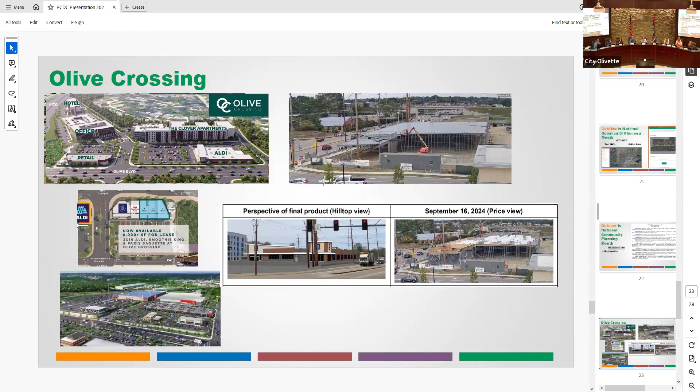I like its placement by the street, I like the retaining wall. You can see it's starting to pop up, and it acknowledges more of that pedestrian level than our neighbor's wall down the road - no offense to our neighbor, it's different priorities. But that level of detail, as we get into Community Planning Month, is the kind of attribute the commission provides that makes these places unique.

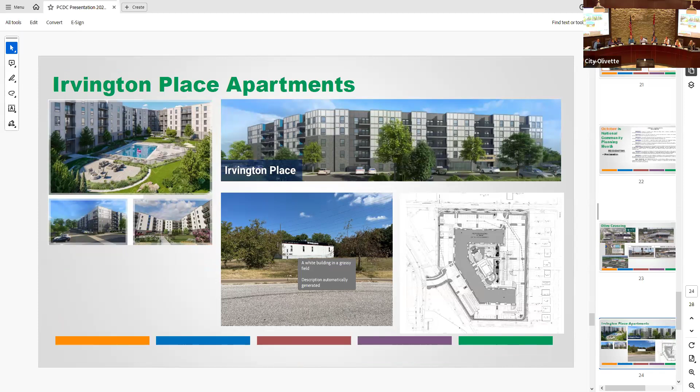Irvington Place is scheduled to start up next month. We got applications for some street disconnections that are going to start going, but that should be moving quickly. Centennial Greenway - if you get an opportunity to go between Dielman and Warson Park, it is a really neat trail with a pretty nice visual back there.

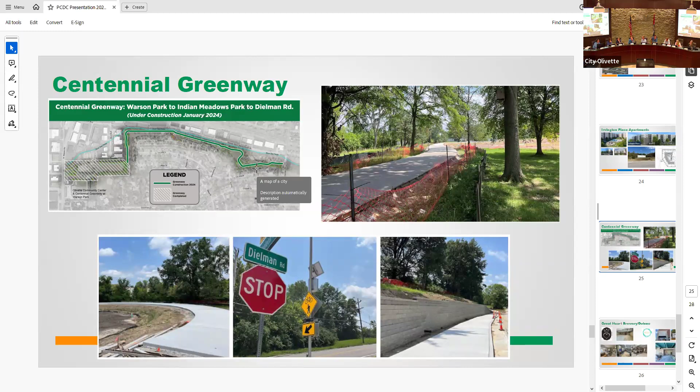And then up at Domo's, I was in there today meeting with them. Their hope is to give the tenant the keys on October 15th or by mid-October, and then they're going to do just some minor touch-ups. I don't have the exact date when he will open, but the signs were up and the sheetrock was in place in the tenant space, and it was coming along really neat, really cool. This is about 915 Dielman Road.

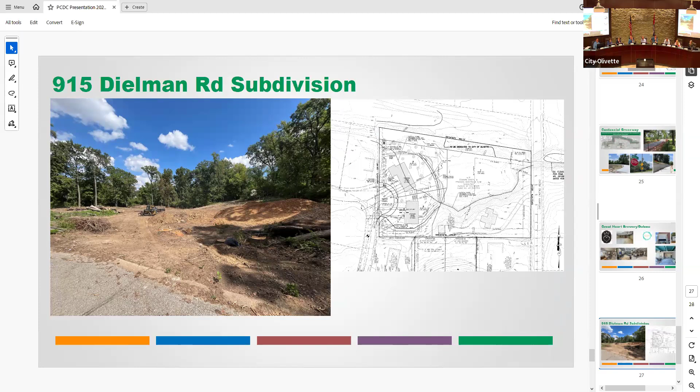They're still doing some of the grade clearing there. I think we'll be seeing those new two homes in the next 2 weeks, and I think that kind of covers it up.

And then of course Don did put a schedule of community events. The big thing is the garage sale, the great clean out, harvest festival, and then don't forget about turkey trot.